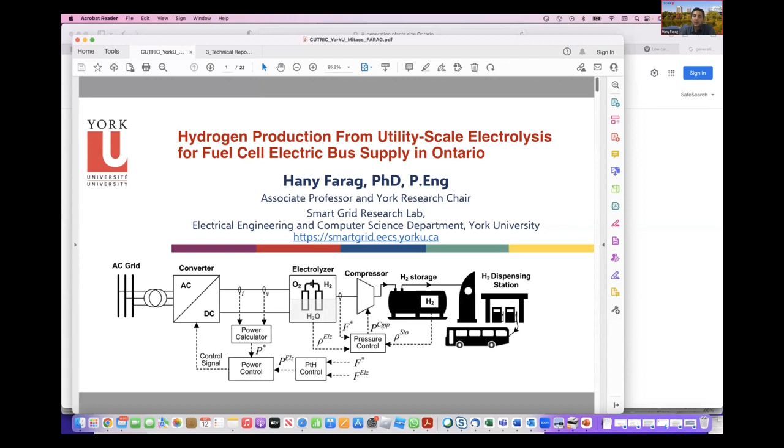So this is an overview about the project we have done with the CUTRIC in the past couple of years. First of all, we did start with a quick review for the state of the art for the different types of technologies that we currently have to, A, produce hydrogen, and B, utilize hydrogen as well. And as I mentioned earlier, one of the key questions that we were trying to address in this research project is how much estimated or projected hydrogen demand we might have if we go for 100% fuel cell electric buses.

We do understand the fact that many transit operators are currently moving toward electrification of their transit fleets. And the number one technology that is currently under investigation is basically the battery electric buses. But we do also understand the fact that fuel cell electric buses might definitely be the counterpart of the battery electric buses at certain time once the technology is ready for implementation and deployment on a larger scale.

So one of the key questions we also try to address is, if we are going to produce that amount of hydrogen to supply fuel cell electric buses, how are we going to produce this from the electricity system? In other words, should we go for more centralized hydrogen generation plants, or should we go for more distributed on-site hydrogen generation plants close to the utilization?

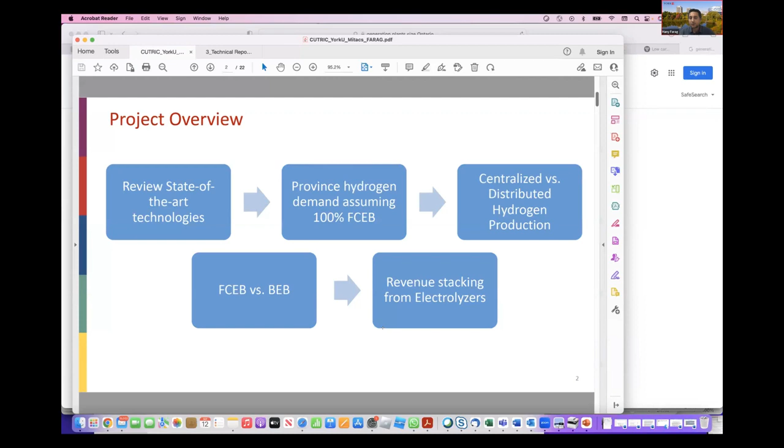We have been working with IESO closely in terms of potential integration of hydrogen plants with the electricity system in order to provide some sort of flexibility, dispatchability, and operability for the electricity system, something that IESO is keen to have in the decarbonization pathways that they published in the recent report last year. And to do so, hydrogen generation plants need to provide services such as operating reserve, demand response, and other grid services that the IESO might demand.

All right, so just to take you to some of the findings and analysis we have done throughout this project. As you could notice here from our survey, there are different types of electrolysis technologies in the market. Alkaline, PEM, and high temperature, they are in different stages in terms of market availability. Alkaline is well matured, yet one of the key issues for alkaline is that it's not highly dynamic, and consequently its potential integration with renewable intermittency is not going to be in favor of that technology. But it might work perfectly for other applications, like when it is co-located, for instance, with nuclear power plants.

PEM electrolysis, on the other hand, is a technology that is currently available in the market, potentially being deployed in the next few years. It has better efficiency compared to alkaline, and it could potentially work well with the intermittency of renewable energy resources. High temperature, or SOEC, is a technology still under commercialization, and it is not that scalable.

One of the key aspects that we have considered in our calculations to come up with the techno-economic analysis needed to design the hydrogen plants that are going to supply fuel cell electric buses is how much electricity demand we need to produce 1 kilogram of hydrogen. And if you look into the manufacturer sheets from different providers of electrolysis, you could figure out that this is in the range of 50 kilowatt hour per kilogram.

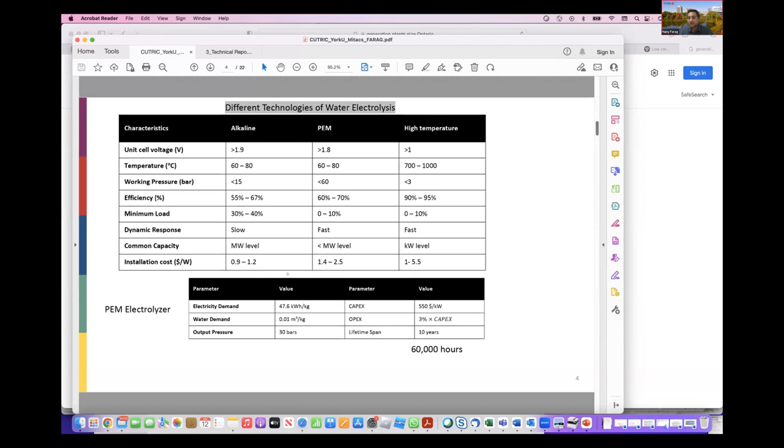CapEx cost is in the range of $550 per kilowatt. Water demand is not going to be an issue, especially in a country like Canada. If we look into the technologies for the fuel cell electric buses from Ballard, for instance, and other providers, we talk about a tank in the range of 40 to 50 kilograms of hydrogen. And on average, the energy consumption for those buses is about 0.1 kilogram per kilometer.

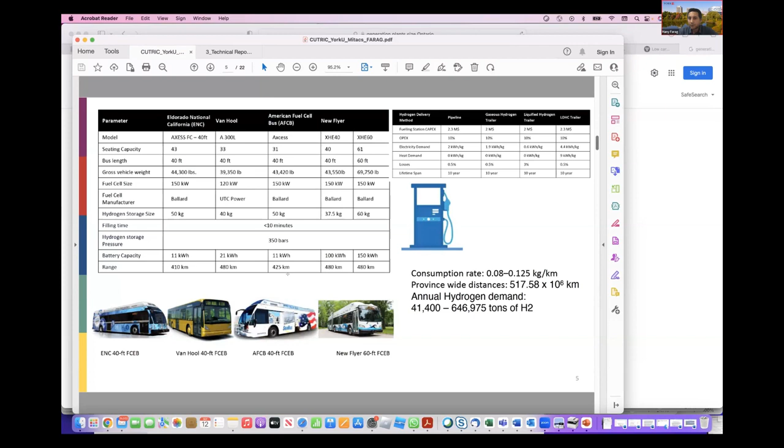So this is a basis that we could potentially look at when we think about running a techno-economic analysis and the optimal design for green hydrogen plants to supply fuel cell electric buses. So we looked into the handbook and we collected all the data needed from transit bus operators in the entire province, looking mainly into how many kilometers are run by each transit network on a daily, monthly, and annual basis, just to quantify how much hydrogen we need per day, per month, per year for that hypothetical scenario of 100% fuel cell electric bus adoption.

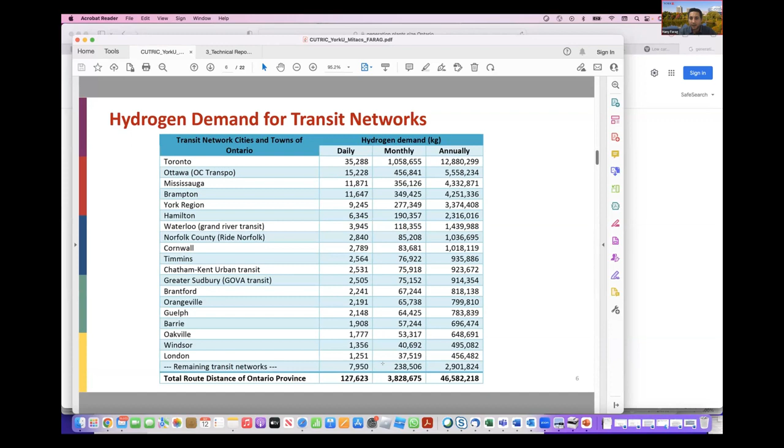And you could notice those numbers, for instance, 127 tons of hydrogen needed per day, 3,828 needed per month, and more than 46,000 tons of hydrogen needed annually to run those buses. Now, from the electrical system perspective, which is the one that I focus on in my presentation, how do we map that hydrogen demand to the IESO zones? So what we did, basically, we looked into the different transit networks and where they are located and mapped them correctly with the IESO zones in order to determine the distribution of the hydrogen demand for each IESO zone.

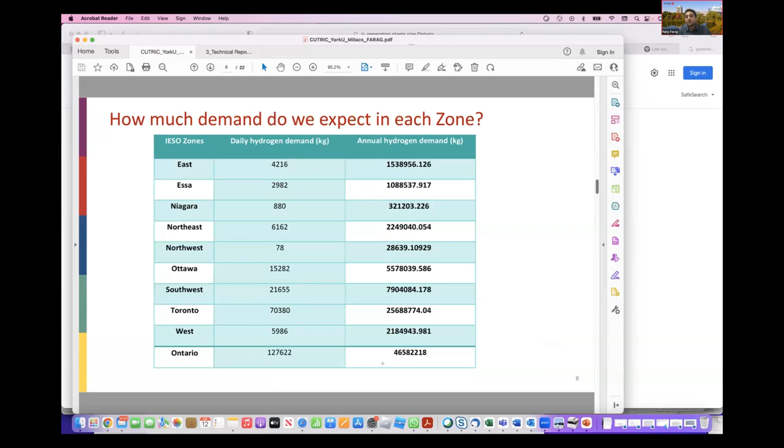Unlike battery electric buses, where it's plug and play, where you just plug in with electricity. So if we do have 100% battery electric bus electrification in Ontario, the demand of the buses will be local. But for hydrogen, it might be local if we do have local hydrogen production plants, or it might be not local if we go for more centralized approaches. So we did the mapping for the hydrogen demand. We looked into two possible options, centralized versus distributed solutions for hydrogen production plants.

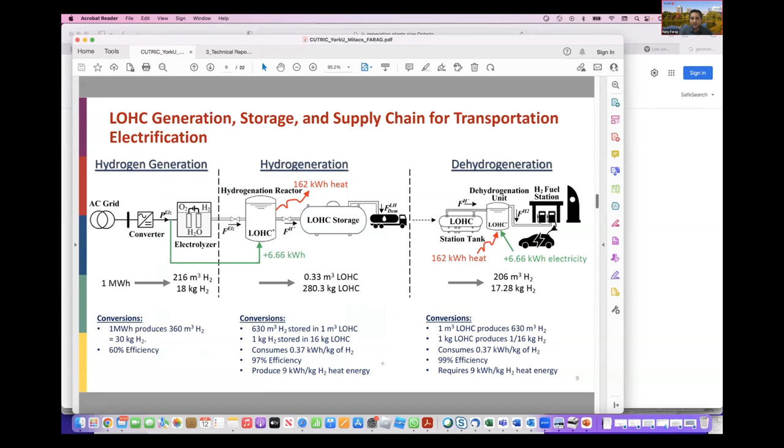So for the centralized hydrogen production plants, these are detailed optimization models that we have developed in-house to come up with the optimal sizing and to determine the capital cost and operation cost needed for having those hydrogen generation plants supplying the fuel cell electric buses. So this table shows, for example, that if we have only one central plant in Ontario, we end up with 534 megawatt or megavolt ampere of electrolysis plant needed. And those are the numbers given for different ISO zones.

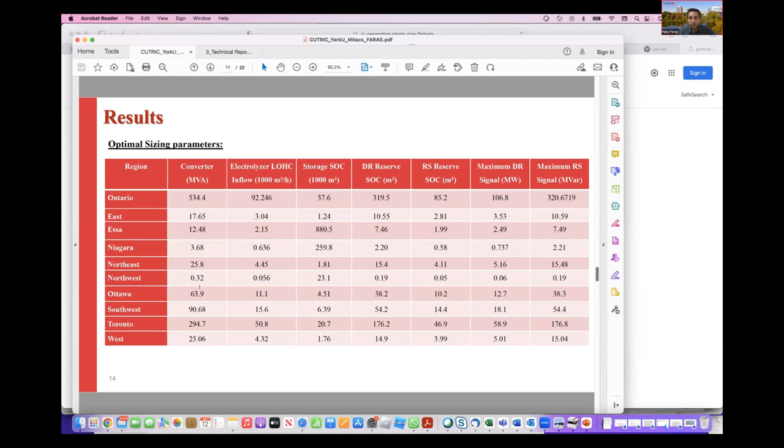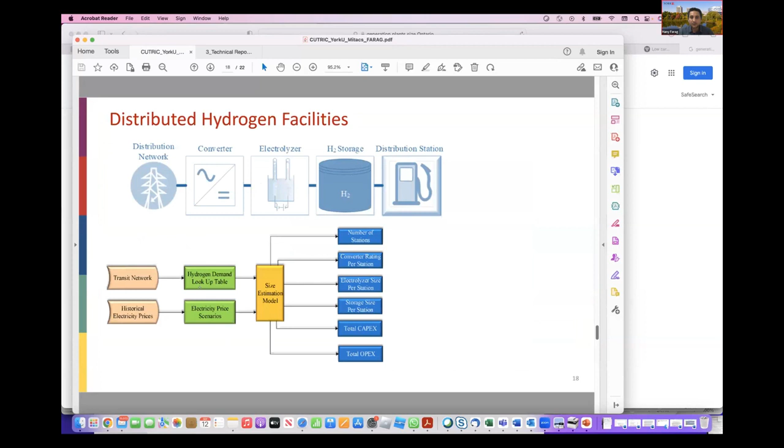The finding is, if we go for one centralized plant, it's going to be costly. It might impact significantly the ISO system. If we go for distributed solutions, it's going to relieve the issues related to transportation. And for this reason, we also did the distributed analysis. This diagram here shows the distribution of the number of hydrogen generation plants needed to power each transit network in the province based on our optimization models. And as I mentioned, there is a trade-off between centralized versus distributed hydrogen production.

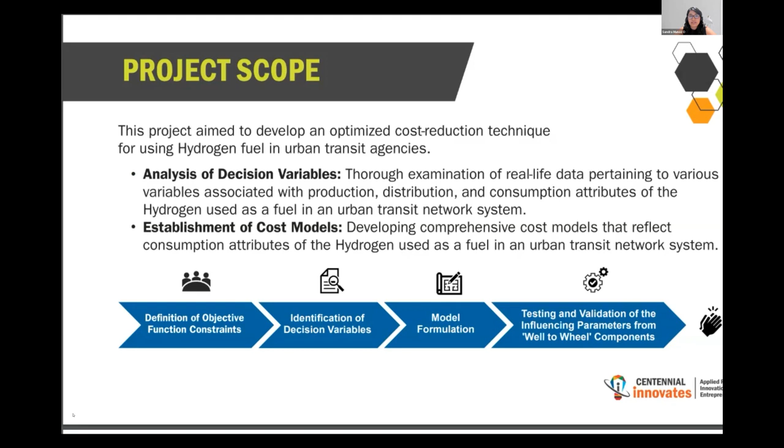So here, Professor Tariq will continue with the technical part. You are on mute. Still on mute. While Professor can get access to his audio, I can continue.

So as I said before, we did a background research and we did a hydrogen analysis of the technology. So we analyzed 3 different main factors. The first one was the production, where we compared the steam methane reforming and the electrolysis of the water. We did some analysis with the CSD, considering that we were planning to generate 1,000 kilograms of hydrogen per day. We use information based on the year 2020.

And for our model, we start in 2021. This project was created in 2021, so that was our start point. Also, we consider that we have a plant life of 20 years. So we were considering that urban agencies will have 20 years of the plan.

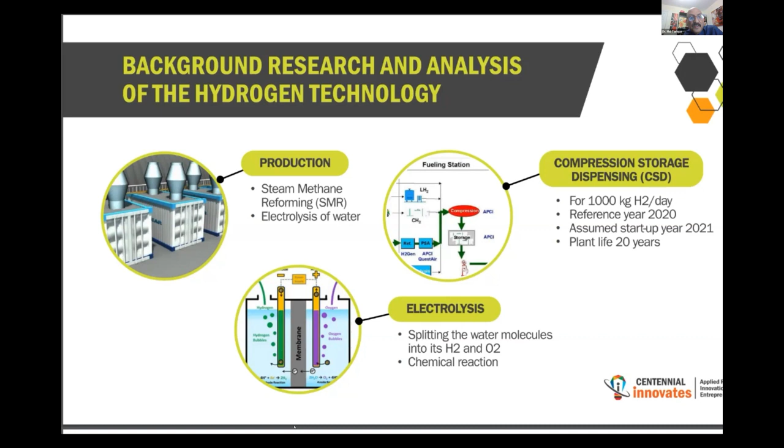Okay. We developed models for CSD, that means compression, storage, and dispensing. And we developed also a model for production. And this is similar, CSD per kg of hydrogen, capital cost, operation and maintenance cost per kg, other variables. And for production, we developed models for capital cost, total cost per kg, decommissioning cost of the equipment after 20 years, fixed operation and maintenance cost, feedstock cost, which in our case is natural gas,

then other costs like electricity, carbon tax per kg hydrogen, but I think we are much lower than the 60,000 ton per year to give carbon tax. So we developed this compression, storage and dispensing model, and we validated this model later on. For dispensing, we considered initially centralized production and dispensing through trucks or other things, but considering the transport and climate and other things, our pipeline, we selected that on-site is much better. Okay, Sandra, go ahead.

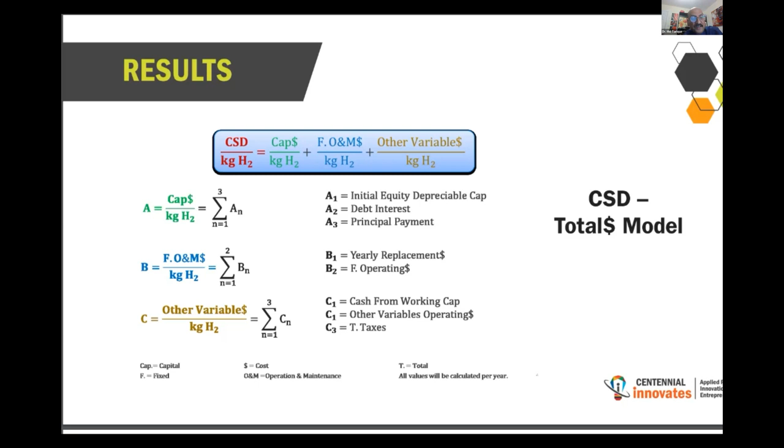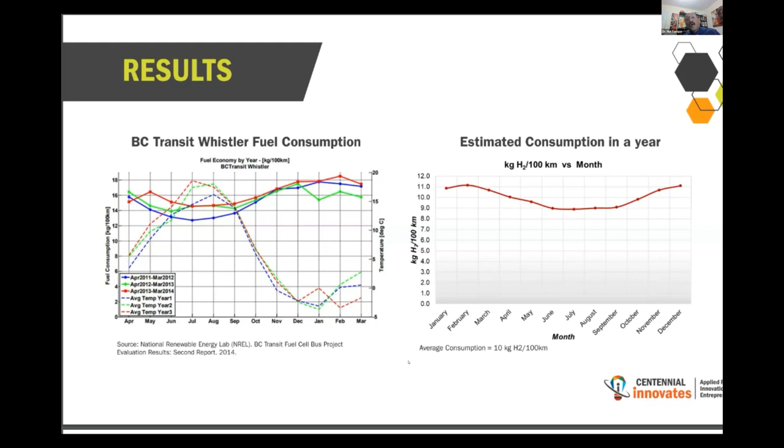This is because, and we got the same thing in our research, which is Ontario based, during winter we identified that the HVAC of the bus is much higher in comparison to other consumption criteria. So HVAC covers the infiltration and exfiltration during winter and summer. We analyzed the bus shell, opening time of the doors, stoppage, and frequency of the stoppage. We took data on those things, and then we validated the model on the right side with our model.

Okay, go ahead, please.

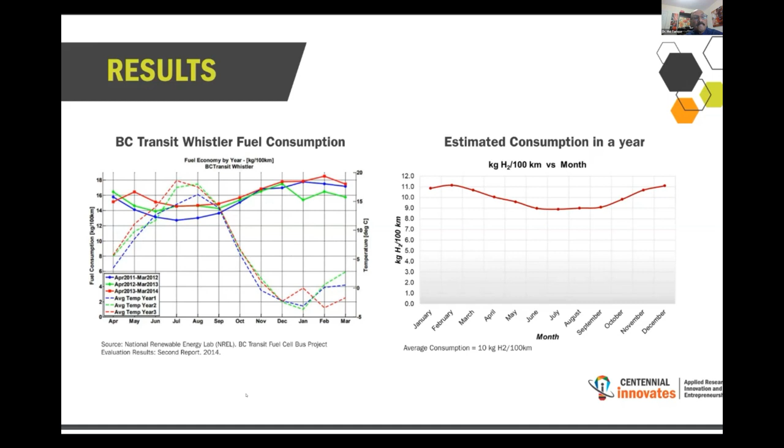We have chosen 10 of the existing bus routes of TTC Transit, and we analyzed on that basis. We took the real-life data. Our students rode the buses and got the real-life data. They calculated the bus stoppage and door opening time, passenger weight. Also, they calculated how many passengers got in. On the basis of that, they found the average daily consumption in a year with our model.

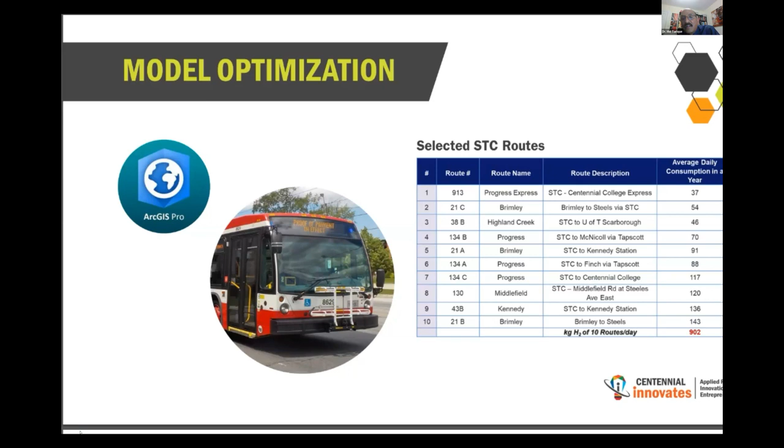For consumption, we identified that we could reduce consumption, because production and distribution may be an established fact, but on consumption we could do some research. We did a lot of research on route infrastructure, the first one with ArcGIS and other existing software. We analyzed the impact of passenger weight on consumption.

We analyzed the uphill and downhill of the existing route, which we call grade later on. We analyzed the temperature effect, the yearly temperature effect. We analyzed those things, and we saw that if you can optimize those parameters, the decision variables of the local optimization on consumption, it could be lowered, and we validated those things with our model. Continues on the next.

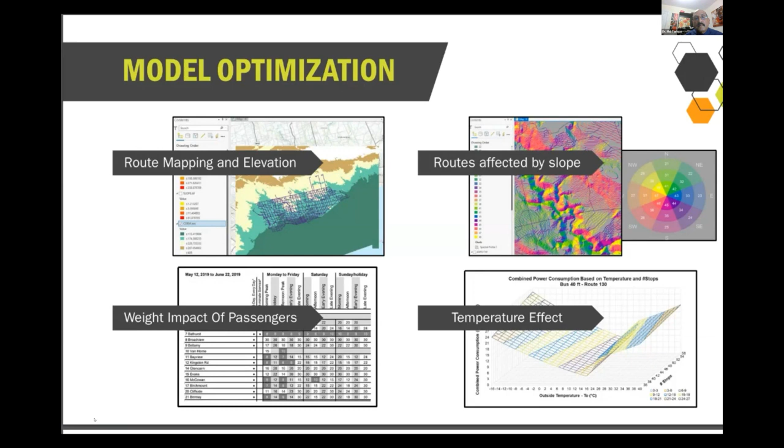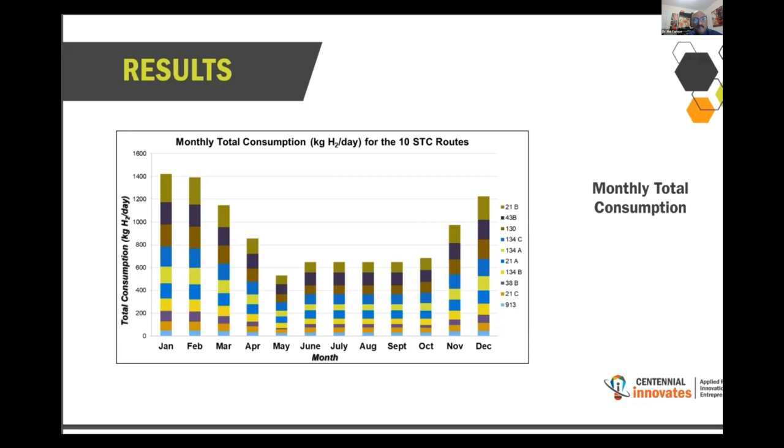But we identified that with more dispensing, more production or more usage of hydrogen, the production cost goes down. It is natural. Okay, right.

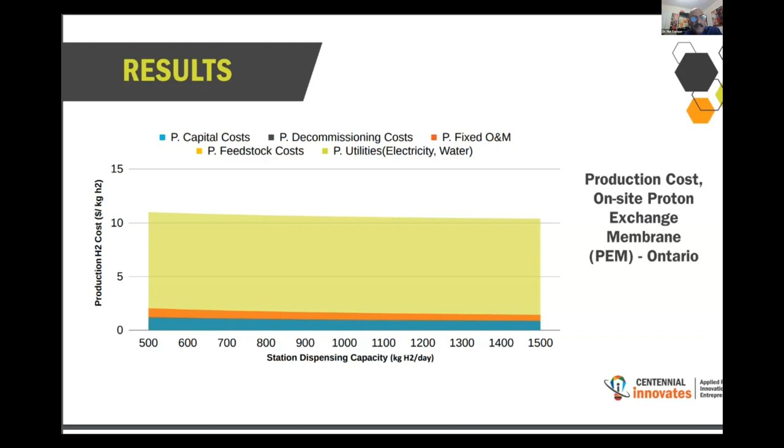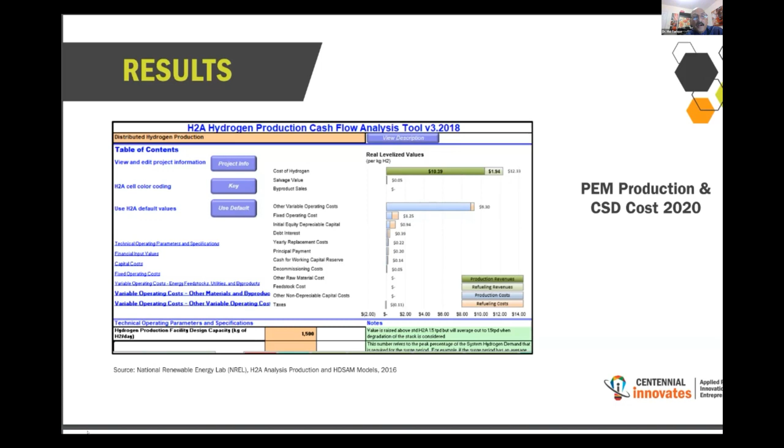So we saw that the existing cost of hydrogen in the USA is 10.29 per kg of hydrogen. And we used this data for our validation purpose.

In conclusion, we can say a couple of things. Steam methane reforming is preferred over electrolysis. For the time being, due to the commercial availability of steam methane reforming production, we have chosen this one. But in future, we can go to electrolysis, that is a different story, or renewable electrolysis with renewable energy. On-site production is preferred over centralized.

As I said already, because of the transport system and the climate conditions, on-site production is better. We have chosen STC for our real-life data collection. STC is one of the hubs we can choose for production, compressing and dispensing it to nearby stations. Similarly, like STC, we can select some other hubs and distribute locally from the hub.

For the selected 10 routes, the average hydrogen production is 902 kg per day, and, oh sorry, I made a mistake, 490 kg per day during off-peak, and peak hour is 1421 kg per day.

Peak hours are from morning 9 a.m. to 3 p.m. Consumption is higher during this peak period. It's natural that passengers are getting in, so passenger load is involved here. And also consumption, door opening, door closing time, and the stoppage frequency is also higher there. Factors such as the number of stops, road grade, and temperatures come into it, among others.

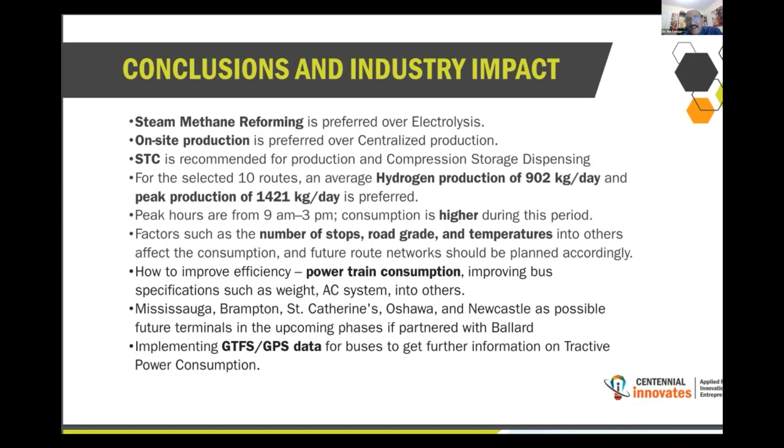Thank you very much. In short, this is our work, and we were given 12 minutes, so we could not tell a lot of things. Okay, thank you very much. And any questions, I will let him answer.

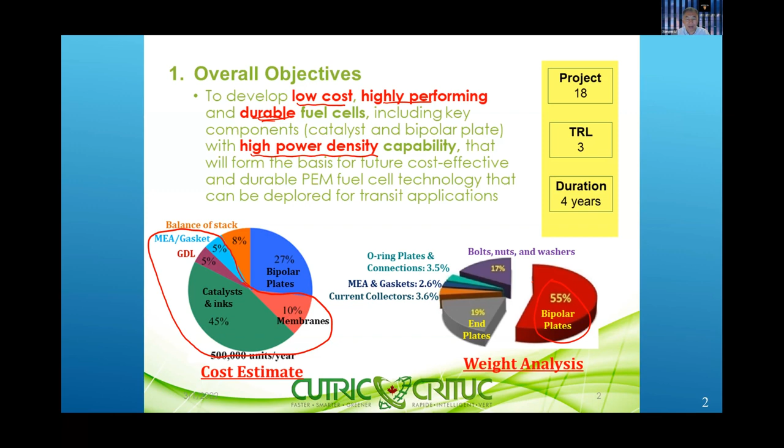So we're looking at the catalyst built into the MEAs, and then we'll look at bipolar plates and build into a short stack. This is kind of a multi-year bigger project. So what ended up happening with CUTRIC was that we ended up with catalyst as phase 1.

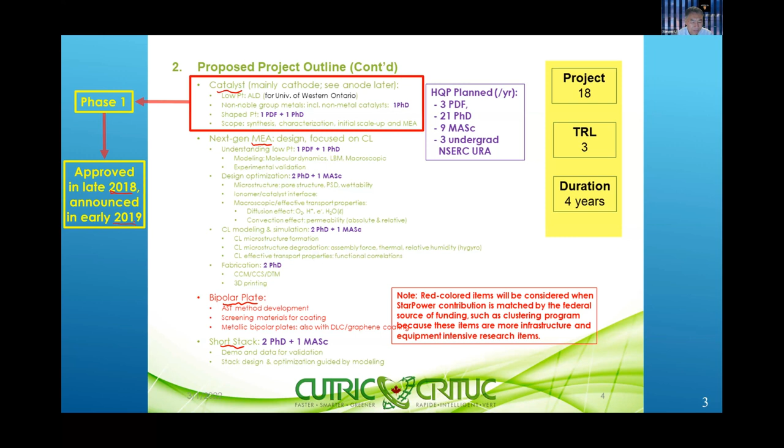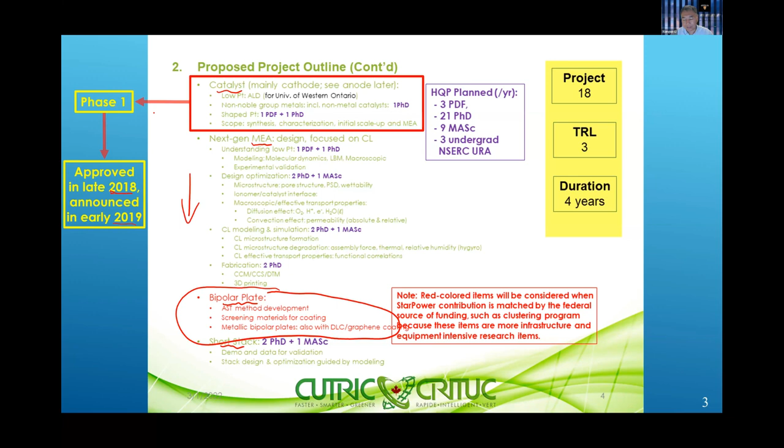As I mentioned, that was approved in late 2018 and announced in early 2019. And currently we do have a separate initiation on bipolar plates, and we're hoping that this will be our next step, directly following phase 1. So that's the general idea of the status.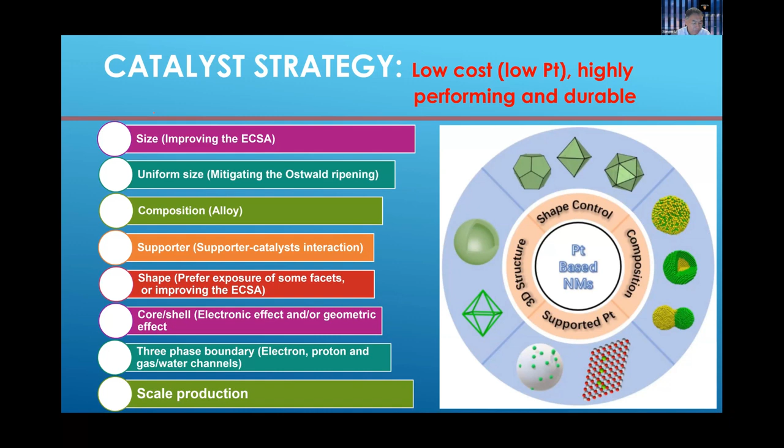In order to improve the catalyst activity as well as stability, a number of things could be done, and most of them come down to the two approaches we are taking in this particular project. One is using atomic layer deposition technique. The idea arises from understanding that in fuel cell electrochemical reactions leading to power generation, it's a catalyzed surface reaction. So what's important is surface area, not mass -- but what's important to the cost is the mass.

So therefore, you could put the precious metal catalyst on the surface of a catalyst media, and only the precious metal catalysts are put atom by atom, lined up on the surface, which reduces its mass loading but still has a large surface area loading such that it can facilitate the electrochemical reaction. Another approach, which is simpler but more engineering application friendly...

...is that we know that for a given amount of mass, spherical shape gives us the minimum surface area. So if you make any other shape other than spherical, for the same amount of mass, you get more surface area. That's one angle.

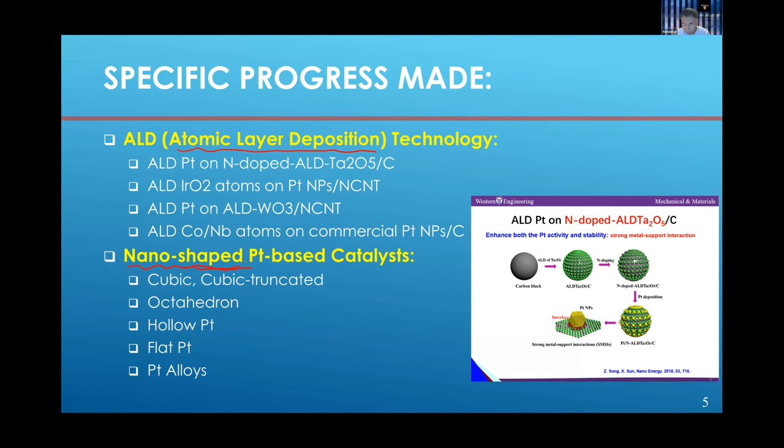Just to be a bit more schematic, this work was done at the University of Western Ontario for atomic layer deposition technique to be used to modify or fabricate catalysts, so that this approach can provide a precise control at the atomic level where you want to put the catalyst atoms, for example.

And since you can control at the atomic level, at a larger scale you will see the catalyst structure or microstructure look very uniform. The technique can be used at low temperature, even room temperature, and this technique can be applied to a large range of materials.

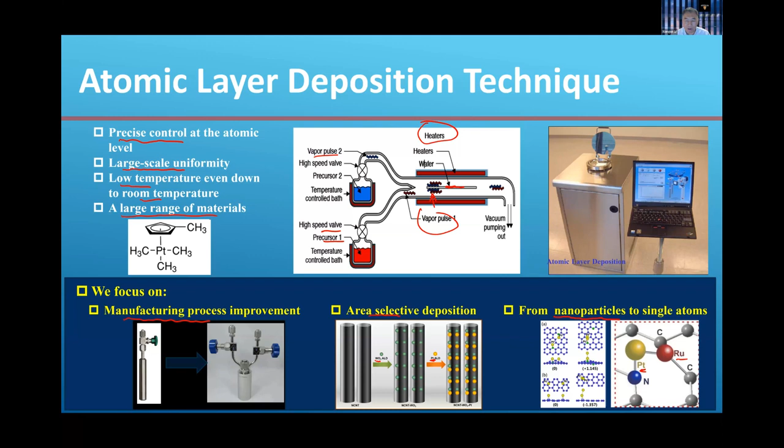Okay, so in that way you see platinum, ruthenium, and different types of atoms can be selectively deposited at the right location you need to make the catalyst more functional and more stable, meaning have a longer lifetime and better catalytic activities, so that you can make various types of complexity of these structures.

I'm not going into the details, basically, so a single atom kind of modification can be also used to modify the existing, for example, commercial catalyst. And you can do the comparison.

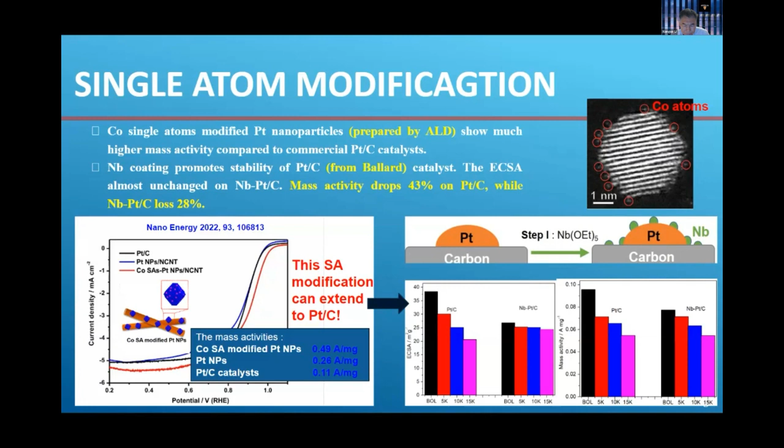Okay, yeah, seems to be working. I'm just going to continue until they stop me again.

So what you are seeing is that from this electrochemically active surface area and the mass activity, the niobium atomic deposition increases. These are the durability cycles compared to the commercial catalysts. These are the doped commercial catalysts, and their mass activity and electrochemical active surface area all improve basically. So that's the general idea.

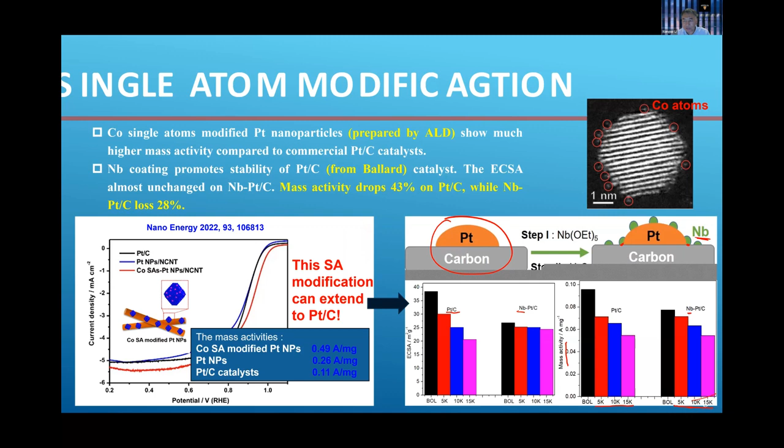And in terms of nano-shaped platinum-based catalysts, what we're trying to do is first we have a carbon support, we do some sort of functionalization or treatment as well as nitrogen doping. Then we put all the ingredients into one pot, like cooking a soup, everything in one pot. And at the end of the reaction, you've got the catalyst you need.

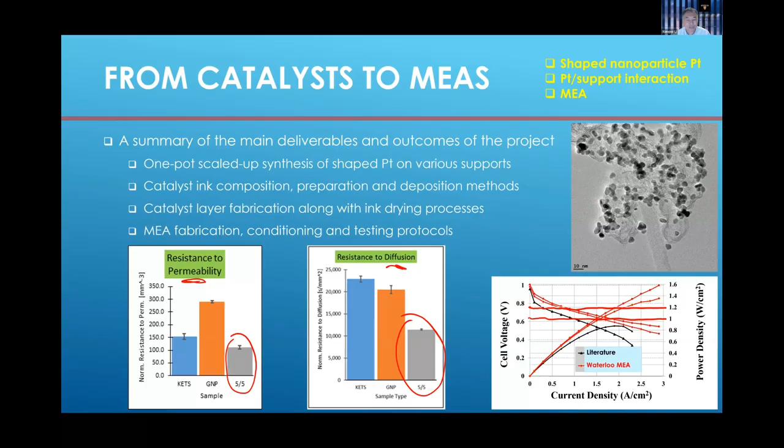So we turned over, both Western Ontario and University of Waterloo, the catalyst developed at the two institutions, to our industrial partner and financial supporter, Ballard Power Systems, and they've done their own characterization measurements. So I'm going to turn it over to Ellen. Ellen, if you could just take over these slides for the work you've done at your place.

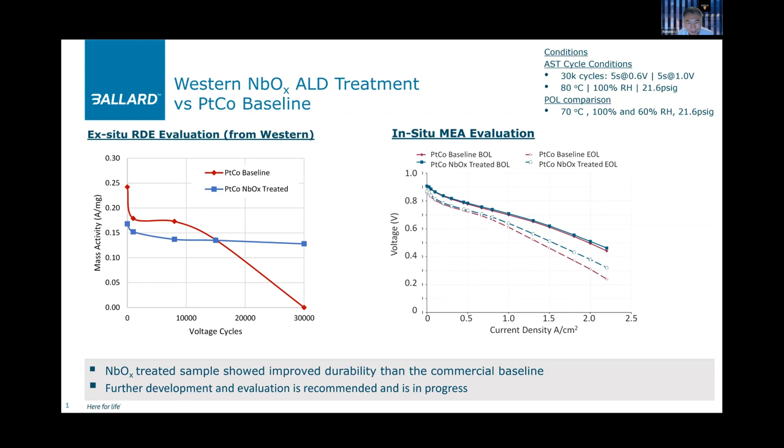Thanks, Dr. Lee. It was a pleasure to work with both Western and Waterloo, and Dr. Sun and Dr. Lee on this project. So here's a brief overview. We kind of took what they developed and tried to put it into a small fuel cell, similar to a bit of the work that Dr. Lee showed. This slide here is reviewing the Western work.

It's just on the left, replotted a little bit the results that they had found at Western. So here you can see a platinum cobalt baseline in red, a commercial catalyst, and then they've decorated it via ALD with niobium oxide, so it's been treated. You can see the durability of these catalysts are quite a bit different. This was quite exciting to us, and we wanted to evaluate it.

So on the right is an in situ MEA evaluation. Again, it's small scale, but we can see a similar effect on durability, where at the beginning of life we see very similar performance. So the treatment did not alter the activity or have any negative impact, but there does appear to be a durability benefit after it's gone through a number of cycles, with the cycling and polarization details and conditions in the top right corner.

So this is a promising result, and we're looking—we've got a few more samples. It certainly needs to be repeated and studied in more depth. We've actually just received samples a few weeks ago to continue outside of the project. The project's completed, but we're continuing to evaluate samples and trying to develop the understanding here.

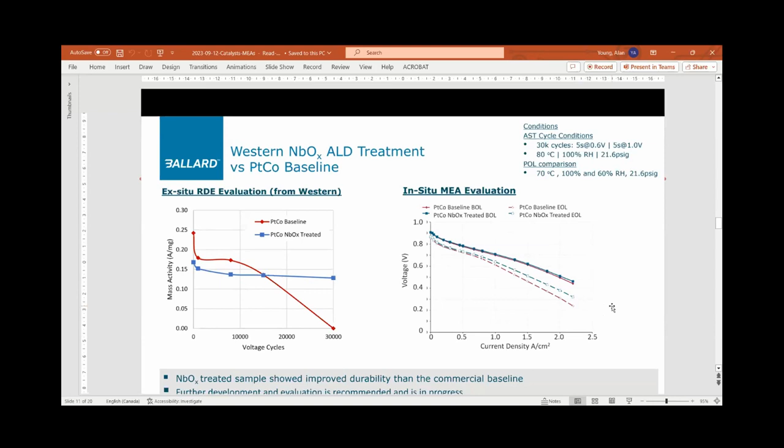It had improved durability over the low surface area catalyst, as Dr. Lee had shown. So it's doing quite well.

What this highlights is the need for much more work and understanding on the scale up and processing of the catalyst. I think it's based on the processing methods we used, we created a layer that underperformed. So that would be a future direction, to understand varying techniques. The technique we used was different than what Dr. Lee had used in his lab. So we have ideas of where we could go to improve this.

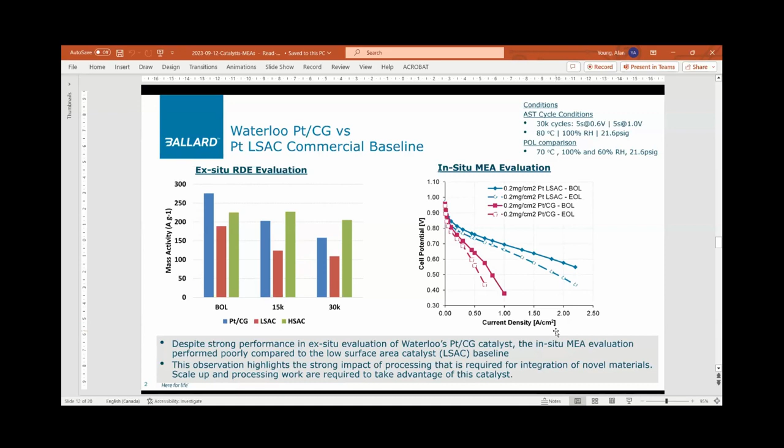That's all I'll say for now. I'll turn it back to Dr. Lee for the rest of the presentation.

Thank you very much, Alan. We're almost done anyway, so this is just a summary, maybe no need for me to read line by line. Basically, this new catalyst has potential to be incorporated into actual fuel cells, but the fuel cell manufacturing procedure may need modification because existing techniques are more suited for existing materials. So if you have different material, you need to adapt to the material characteristics. That being said, we're looking forward to our next phase of the project.

Okay, so I'll stop over here and thank you all very much.

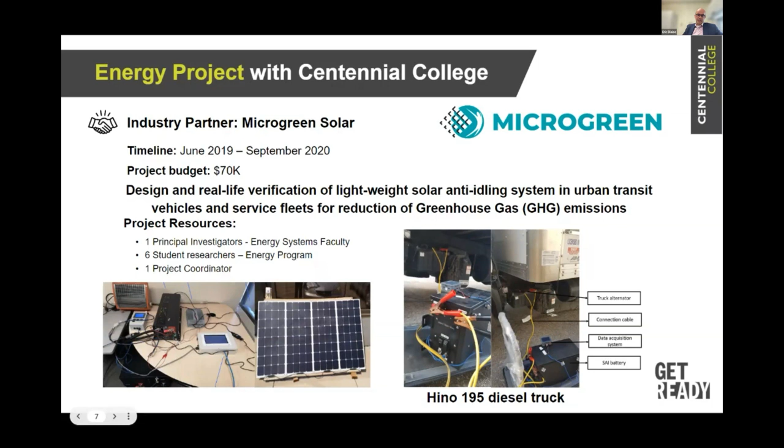Now I want to highlight an opportunity for additional industry partners to come and work with us. We recently received a Mobilize grant from NSERC. It's $1.5 million over 5 years. And the major themes that we focus on are electric vehicles, but also low carbon mobility and automotive and hydrogen, and also aviation, mainly repair and overhaul of aviation. So these are what we have funding readily available to work with industry partners on.